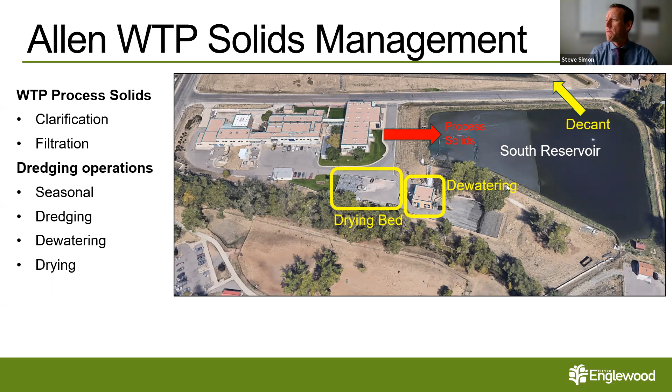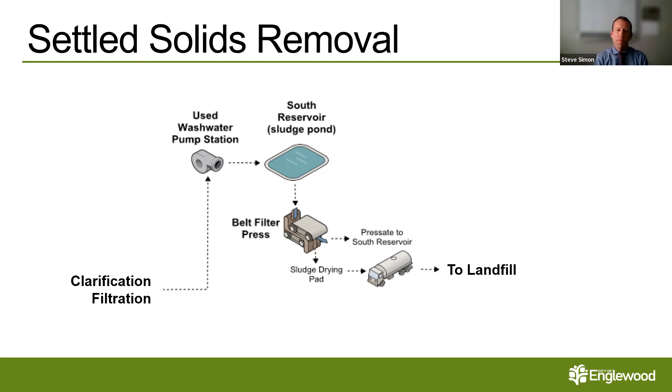So the need for this is that reservoir is approaching capacity. I mentioned that these solids have been building up over the course of decades and that we're unable to remove them at the same rate that they're produced. And so we're actually getting close to reservoir capacity. And when we reach that capacity, it can impact our treatment process. The solids management is a critical part of that treatment process. It can also have water quality impacts.

I mentioned that the water from the western cell spills over that wall and then can go up into the north reservoir where it can be returned to the plant. If we're filling up that basin with solids, some of those solids can actually carry over, and we don't want that to happen.

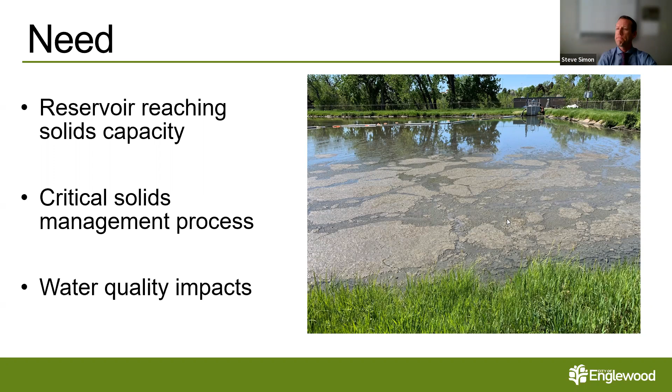So staff solicited a competitive procurement for this. We procured it as a fixed price of $200,000. The competitive nature of the procurement was who can remove the most solids for that fixed cost. So 4 contractors responded to the solicitation. BioVelocity came in with the most solids that we'll be able to remove for that $200,000 fixed price.

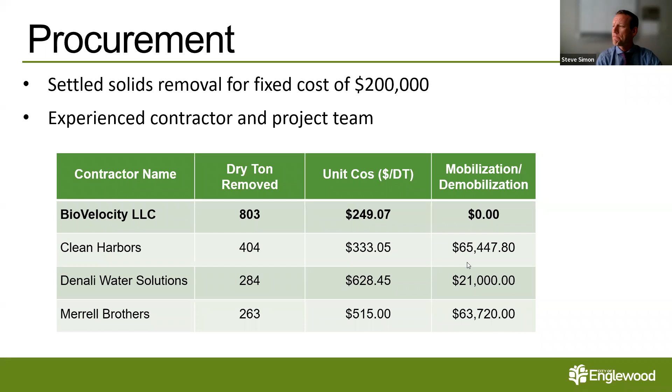They also came to us with the experience regionally and elsewhere doing this type of work. So the selection panel recommended moving forward with BioVelocity. In terms of project execution, pending successful approval of the contract, we will be getting the work this summer. We expect about a 3-month duration with the solids volume that our recommended contractor can remove.

We estimate that we're going to be able to remove about 70% of the solids that are in that pond. So there will be one more cycle of this next year to get those remaining solids removed. We're also evaluating our long-term solids management plan. So I mentioned that we're unable to remove at the same rate we're producing.

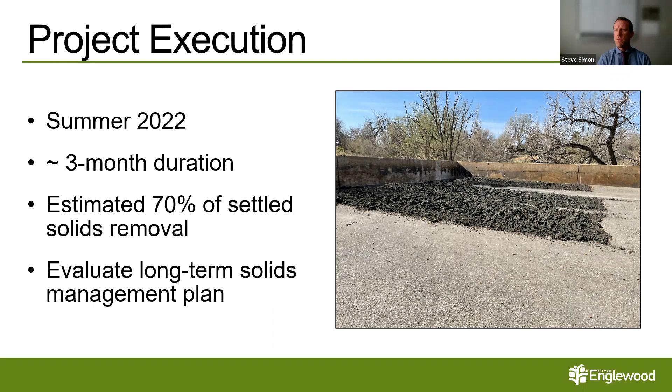So we're going to look at that current process and see if it makes sense to continue that process, which would require intermittent contracting of solids removal, or if we potentially want to adjust the capacity so we can more closely match that. So that concludes my presentation, Chair. I'll be happy to take any questions.

Thank you. I'll throw in. Oh, actually, Joe, go ahead. I see your hand raised. Thank you, John, and thanks for the presentation, Steve. What are in those solids? Is there anything that's hazardous in any way, and what's the removal timeline and process like for finally getting those out of the drying bed and on to wherever they go next?

So in terms of what's actually in the water itself, it's naturally occurring organics and other constituents. So we draw our water from the Platte River or through City Ditch, all of which are sourced from Chatfield Reservoir. So a lot of naturally occurring constituents in the water. There is some from the water we take out of the Platte River. There is some effluent that contributes to what's contained in that. But I'll speak to this a little bit in the hauling, but I'll go ahead and

touch on it now. We did look at TENORM, which is technologically enhanced naturally occurring radioactive material. Some of you that are familiar with the history of this know that that's something that has existed within a portion of our water supply. So we actually tested for the presence of that and found that those levels would allow us to take the dried solids to a non-hazardous landfill. So that was really good news for us.

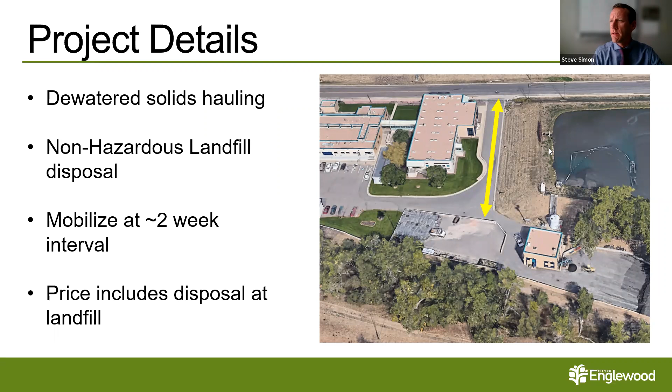Again, we had a panel that prepared the recommendation based on value and based on success in performing similar work. So staff did recommend going forward with Radiation Pros. And that concludes this portion of the presentation. I'm happy to take any questions on the hauling aspect of this project. Any questions?

So Steve, I'll slide in a question, although it might have been better on the prior one, but you mentioned this will take care of 70% of it. Are there not economies of scale that would warrant just getting the other 30% done now as well, or is that not a significant concern? I don't think it's a significant concern at this point. Another part is that 70% is an estimate.

And so we went and did some analysis, which required taking samples at different locations throughout the pond to estimate that. Some of the feedback we got from the contractors is that how much can be removed for a fixed cost is, I guess, a fairly common approach to this type of work. So given the relative uncertainty of how accurate that 70% is, the recommendation was to stick with the fixed cost of $200,000. All right, perfect, thank you.

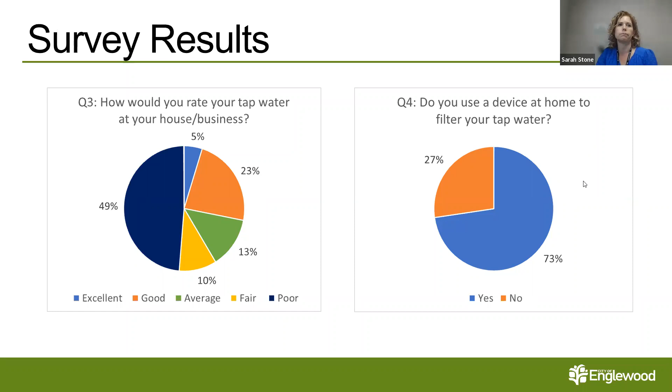Okay. The respondents were split on whether or not they buy bottled water. And then the next couple questions are related to the aesthetics of the water. So when asked if customers had experienced discoloration in their water in the past 6 months, 62% said they had not.

And then addressing the taste and odor in the past year, this is asking really for any noticeable improvements. And this provides us with a baseline of where customers' opinions of the water, taste, and odor are currently. And we're hoping to then trend the answers to these questions over the coming years as we start to invest in the capital that's addressing these specific issues.

So turning to the cost of services, we asked a couple questions related to the cost of water. So related to the cost of delivered Englewood drinking water to customers' homes or businesses, the question was framed in that the cost of delivering water is less than a penny per gallon as it's delivered to your home or business. So the majority of the respondents, almost 70%, rated the cost of water from fair to excellent, with only 26% rating it poor to unacceptable and 5% not answering.

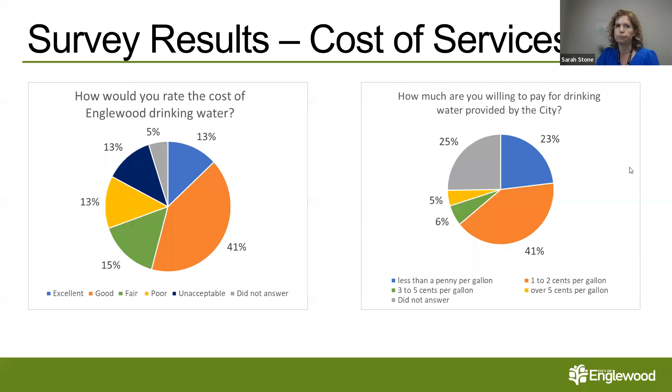We had two open-ended questions. One was just asking what people might be willing to pay for bottled water, and that ranged between a penny per gallon to $3 per gallon. Some of the other written responses to that were not applicable or don't buy, and should not have to buy. And then we left quite a bit of room on the hard copies and in the online form for any additional comments that people would like to provide to us. And the common themes were related to the cost of water, as well as, to be expected, the taste, odor, and hardness of the water.

In your packet, that Polco report did include all of the written responses that we received, and then we compiled the hard copy responses and transcribed them to be included at the end of that Polco report. So you also have anything that was written that we could read. One of the things that we did see in the written responses is people questioning whether the cost of water really is less than a penny per gallon. So I just wanted to present to the board how we got to that calculation.

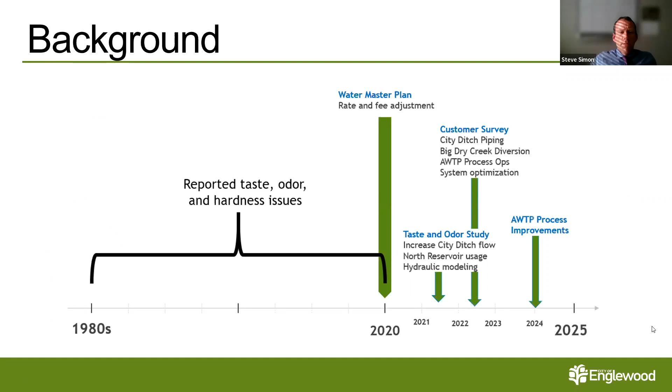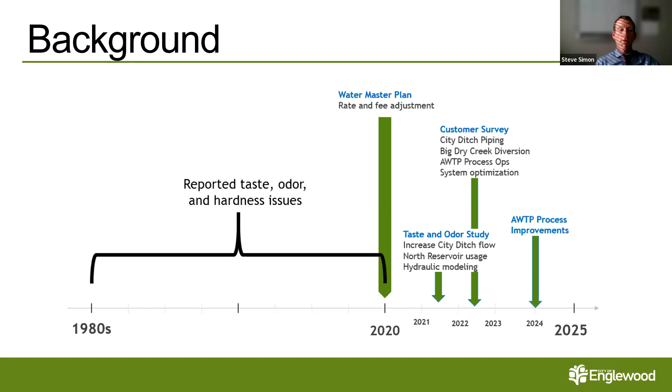Okay, so I wanted to highlight some of the activities that we've been performing related to addressing taste, odor, and hardness issues. Really important was the completion of the master plan back in 2020 that did recommend a suite of projects that are targeted for taste and odor. That, as all of you are aware, resulted in a rate and fee adjustment that then allowed us to move forward with these various other projects and operational studies to determine how we can best resolve those issues. Next slide, please.

And so I wanted to point out that these aesthetic issues are not safety issues. As Director Van Ry mentioned, the water is meeting all of the regulatory requirements. But I did want to point out some of the characteristics that come with that taste and odor. This may be familiar to those of you: earthy, grassy, swampy type characteristics. These can often be really informative for the source, whether that's a raw water quality issue, or water age, which is how long water moves throughout the distribution system, which can also impact that.

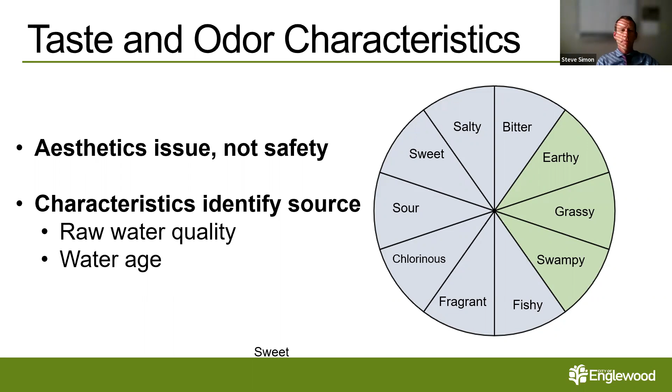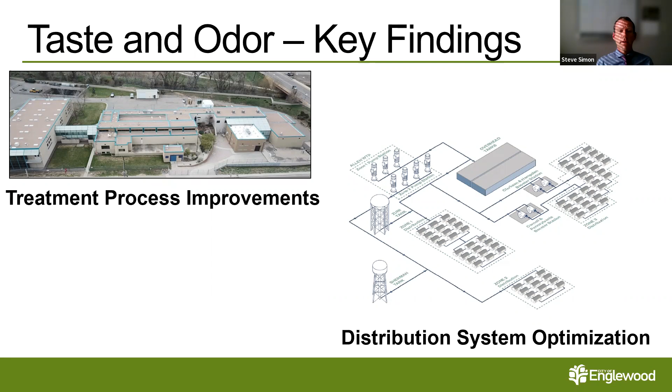Next slide, please. So in terms of the findings of the study, we assessed the water quality issues and the water quality testing to come up with various capital improvements and operational improvements that can be made. There are process improvements that can be made at the treatment plant, including a softening facility directly targeted towards hardness removal. There are distribution system optimization options that can help reduce the water age that can contribute to taste and odor issues. Next slide, please.

City ditch piping, which we've talked about on multiple occasions with this board. That's the project that's really going to allow us to move more water through the city ditch system and reap those water quality benefits. And then finally, the Big Dry Creek diversion project. I think most of the board is familiar with that as well. That is a project that allows us to divert the Big Dry Creek from directly upstream of our Union Avenue intake to downstream.

One of the lessons on why water quality testing is important to take seasonally throughout the year is that what can be true during a certain period of time may not be true in another period. And that's one of the things we were able to discover over this winter, the impact that can have on the Big Dry Creek water quality, and also the impact that has on the river water that we take in through the Union Avenue intake.

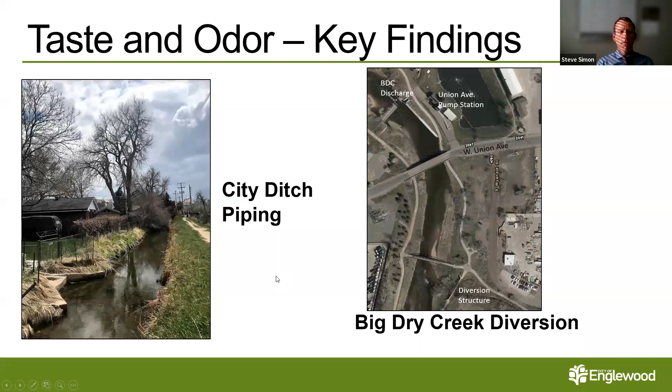So we've touched on this a couple of times. One of the really important lessons from this is it's not a single magic bullet that's going to solve all of the issues related to taste, odor, and hardness. It's a multifaceted approach. There are capital improvements that can be made, there are operational improvements, and collectively, these are what can address our taste and odor and hardness issues moving forward.

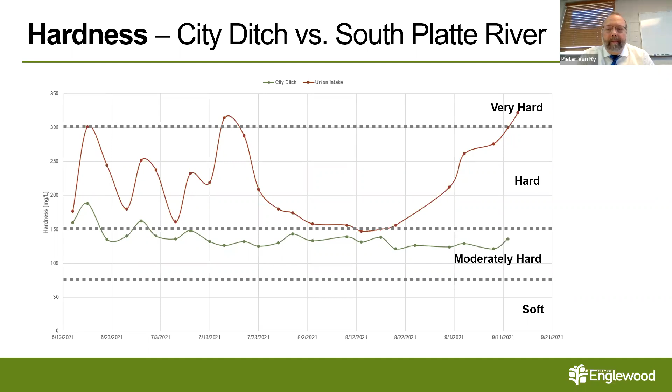All right, it looks like we have a number of questions. I am going to ask the board: we're down to just 11 minutes and we still have a number of issues we've got to cover. So hopefully we can get through some of these questions quickly, but let's go ahead. Caitlin, Joe, then Marshawn.

My question as far as the hardness, as you see the decline in June and July and then back up in September, is that really just related to water flow? Because of the water years, it's that high peak in the summer and then the water drops from the mountains? That is one aspect of it. Another is rain events. Rain events can really significantly impact the water quality in the river. Okay, thank you.

Joe next. Thanks, John. Steve, is the measurement for the hardness in the city ditch where it comes into the water treatment plant, or is that coming out of Chatfield? I believe that's taken as it comes into the plant. I can confirm that, but I believe that's where that sample was taken. Okay, good. Thank you. You're welcome. Marshawn.

Yes, I was wondering, when you say water age, what are you referring to? Age of the water? That's how long water exists in a system. So when it comes out of the plant to when the user actually accesses it, it's how long that water has resided in the system until its final point of use. So you're not referring to storing it in the reservoir? No, that's the period of time between when the water is pumped from the facility into the distribution system to its final point of use.